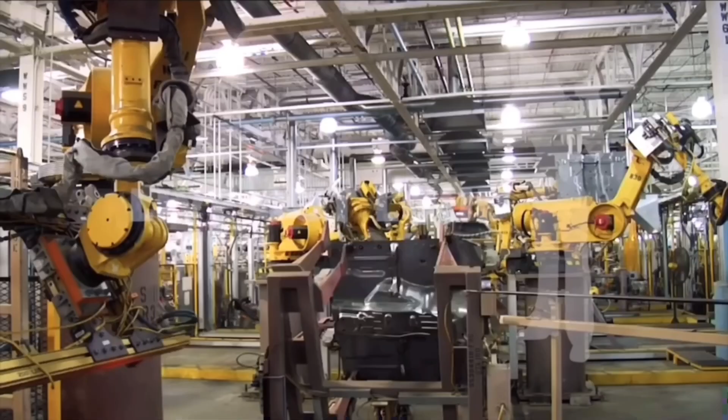Every year, nearly 10 to 30 million commercial flights occur globally, and the chances that you've flown on a plane at least once within your life is very high. You also probably don't realize that flying is one of, if not the safest mode of transportation, and that's thanks to all the engineers, manufacturers, and government-issued safety standards that go into place to make flying safe and at least

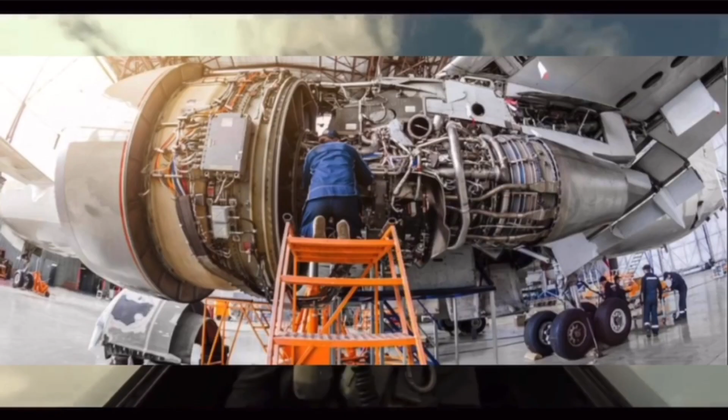somewhat affordable. So obviously, planes are pretty cool, and there are many people who strive to be pilots or just have a general love for aviation and the engineering that goes into it. Unfortunately, I wasn't one of those people, and the only reason I chose aerospace engineering as my major was just because I wanted a stable living. But damn it, if you don't learn to love something by spending 12 to 14 hours a day for 3 years talking about only that, I don't know what will.

Some people just have a natural tendency for it, like this lovely individual here, who watched an old, really horrible quality video about stealth planes I made on this channel. Thank you very much, by the way. And in honor of him, I wanted to make a more high quality, in-depth video, since today's me has a lot more knowledge on it than younger me. So come with me and let's go over some basic topics and fun facts that go into aviation and aircraft.

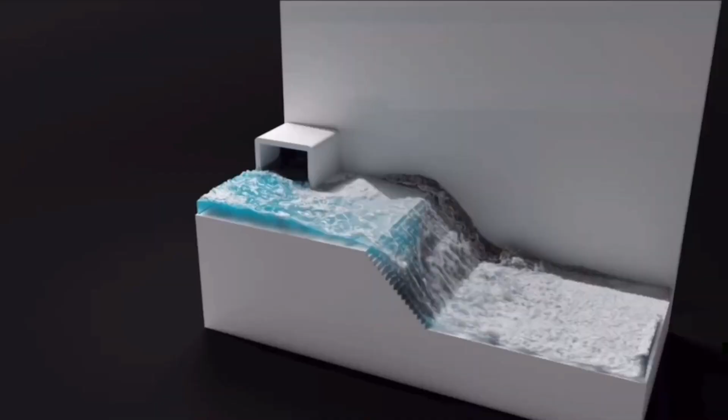There are a lot of fundamental things that are learned before you ever even talk about an airplane, such as statics and dynamics, but the most essential is fluids. A fluid, by definition, is a substance that deforms continuously under shear stress. Liquids and gases fall into the category of fluids, and the property of fluids is actually the driving mechanism for what makes planes fly. We equate the properties of the fluids from one state to another with the Bernoulli equation, at least for very simplistic ideal flows with no extra energy added to the system.

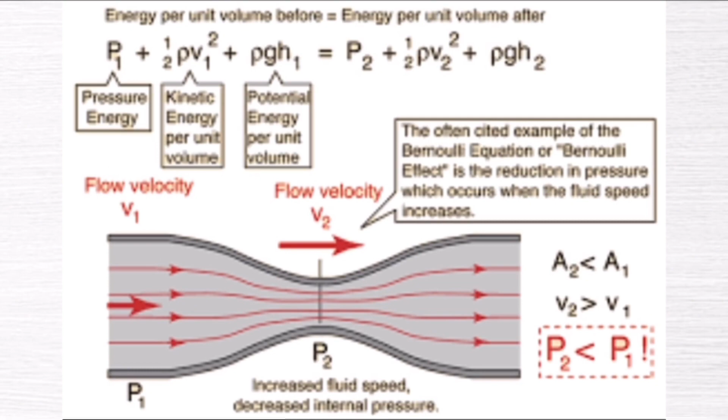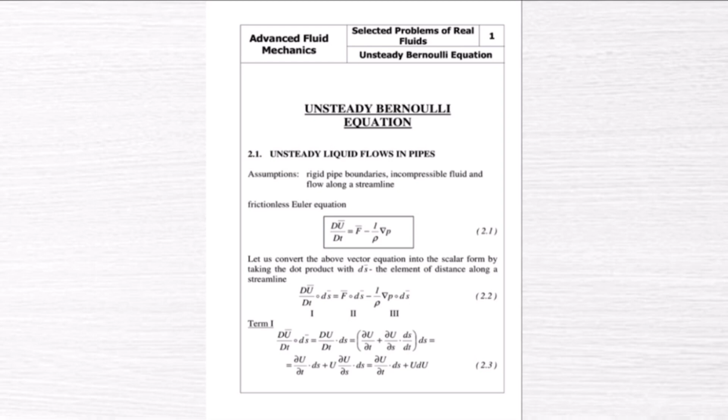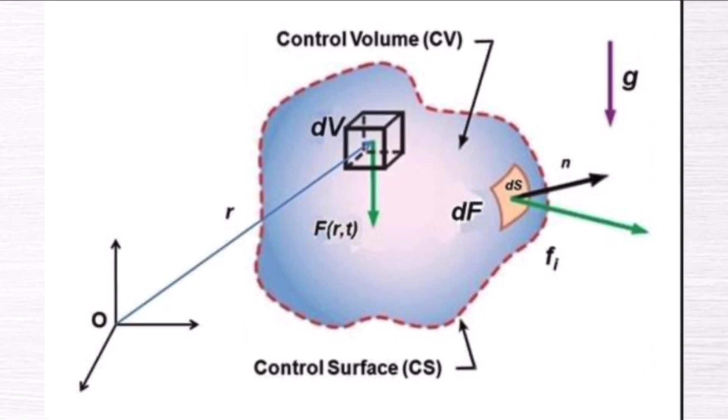This equation itself is actually more complex than it looks, because this is only for incompressible flows, but for compressed airs, the properties of fluids like density can change with location and even time, so a gradient of this formula also exists, and solving it is much more difficult. There are also other ways of calculating different values for fluids, such as how much force it applies when flowing through a system using control volumes and control surfaces, but that's too in-depth and unnecessary for a brief overview.

But looking back at the Bernoulli equation, we see that the two sides must be equal to each other. So if constants on one side remain constant and one value is changed on the other side of the equation, another must be changed on the same side in order to compensate. For example, if we increase the speed on this side, something must decrease on this same side to make it equal, in this case being pressure.

This change in pressure is actually what we want when we want to create lift for an airplane to fly. Controlling the speed of the airflow over and under the wing, we can control the pressure, and if the pressure is greater under the wing than over it, then there's more force pushing it upwards, and this creates lift. This concept applies for both subsonic and supersonic flight, although for supersonic flight, we take into account the change in pressure due to shock waves.

So how do we control the speed of airflow around an object? Well, we do this with airfoils, which are aerodynamic. There are many different shapes of airfoils, but the best shape for easy conceptual learning is an infinitely thin flat plate. Adjusting the angle of attack for a flat plate, we see that the airflow must go around and over the flat plate in order to reach the back tip. We call this the Kutta condition.

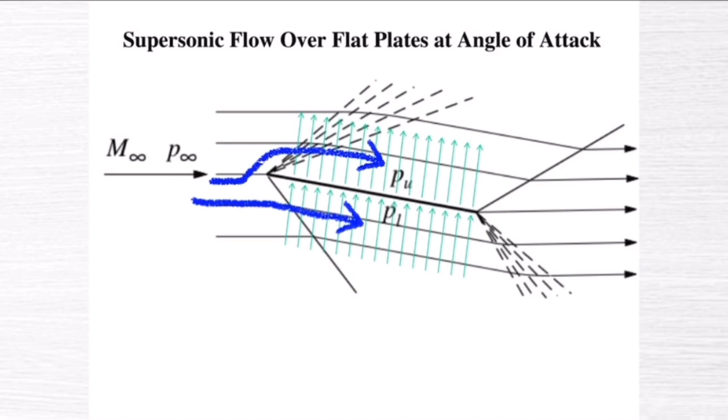Since the top flow needs to travel a further distance in the same amount of time to both leave from the trailing edge, it makes sense that the top flow must be faster and therefore have a decrease in pressure compared to the bottom flow, allowing for that desired pressure difference. Now, very rarely do we deal with the actual values of pressure, lift, and whatnot in aerospace engineering, but more so we deal with the coefficients, which are non-dimensionalized, so that we can relate how a prototype will work to how the real thing would work.

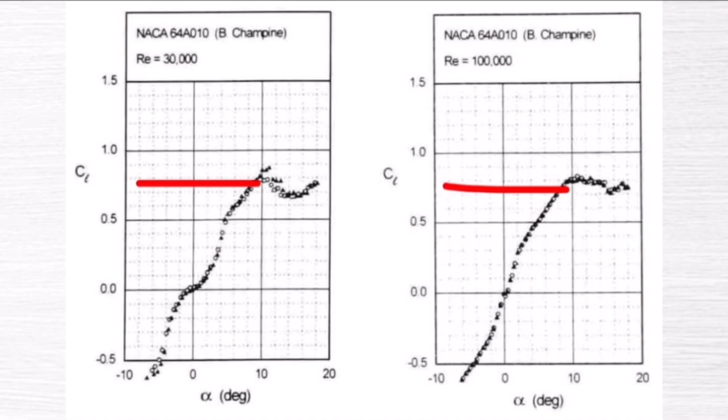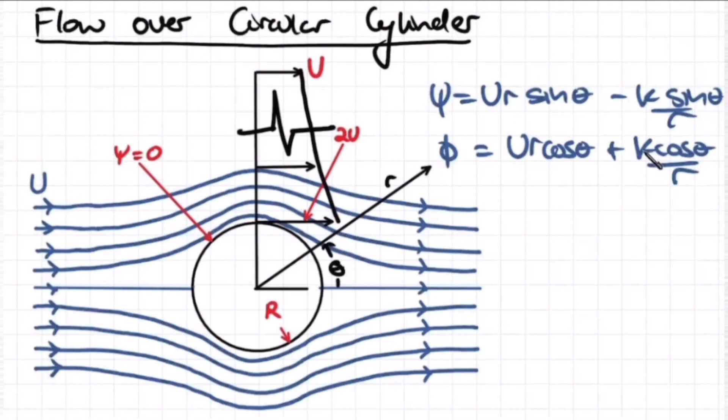We can look at many different lift curve slopes for different NACA airfoils, and we see that each airfoil type has their own different slopes, max lift coefficient, different angles of attack for stall, and whatnot. We can also see their drag coefficients, but we won't talk too much about drag because drag has a lot to do with form drag, which is the shape of the object, and friction drag, which has to do with viscosity and the Navier-Stokes equation, and it just sucks.

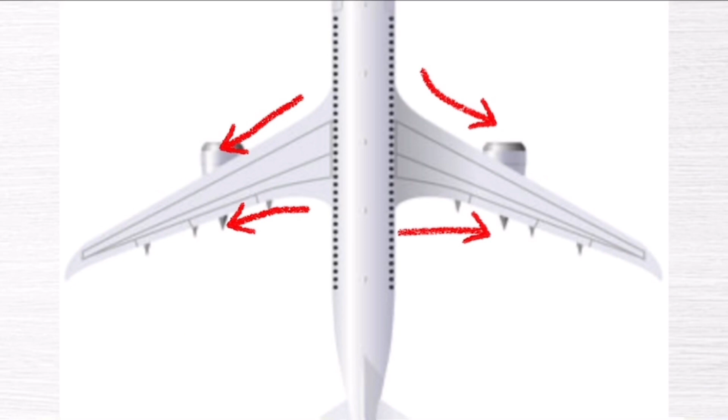So just leave it alone for now. But keep in mind that an airfoil is not a wing. An airfoil is two-dimensional and just the cross-sectional shape of the wing at any point. And since wings usually change their shape from the root, then the airfoil changes along the wing as well. So when we do look at the wings, we already know it is the accumulation of all the airfoils one after the other composing the entire wing.

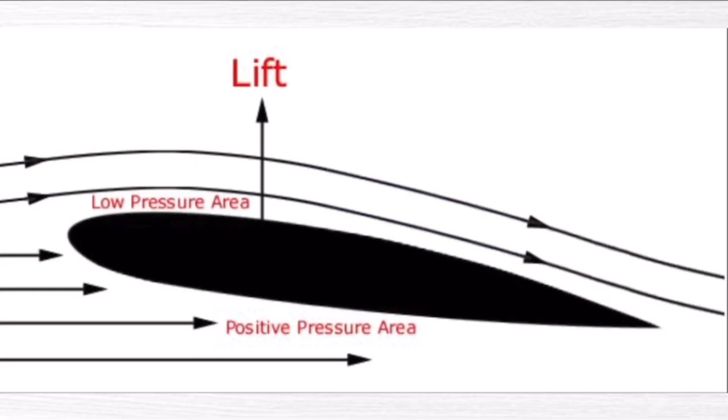So to find the properties of the wing, such as lift or drag of the entire wing, what we have to do is integrate the properties of the airfoils along the wing to find the values for the wing itself. So there are simplistic formulas to calculate the lift and drag of an airplane at different speeds, altitudes, or whatever, but what we need are these lift and drag coefficients.

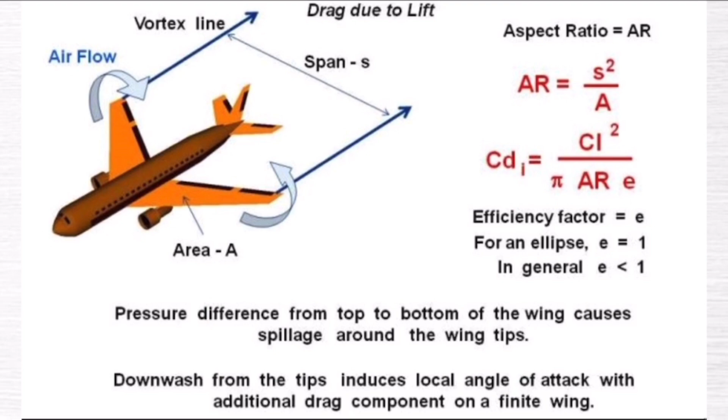These coefficients are solved either experimentally through prototypes, which is an expensive endeavor, or through computation since the mathematics cannot be done by hand. There are other ways to solve a simple wing design by hand, but there are a lot of assumptions needed to be made, such as having an elliptical planform shape, which obviously isn't true of all wings. Most of the computational methods for solving for these wing coefficients that include not only the wings but the effects of the horizontal and vertical stabilizers are paid for by companies who have already made them.

But the most simplistic computational methods I learned in college for incompressible flows are the lifting line method and the vortex lattice method, which have their own strengths and weaknesses, especially when compared to professional softwares that are obviously super powerful and give high accuracies for real-world expectations.

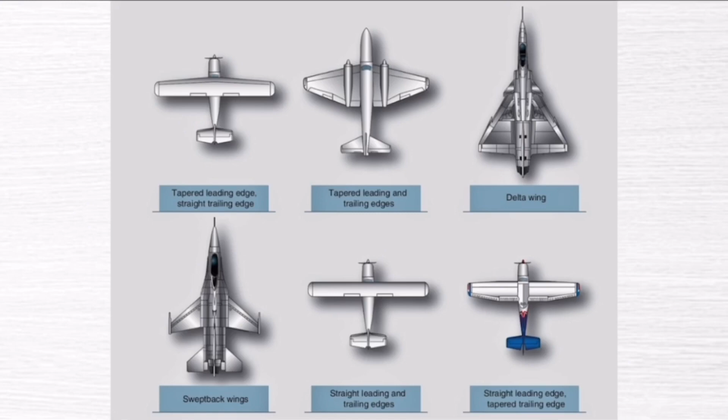Now, as we see, not all airplanes are built the same, and we see the biggest differences between commercial planes and military planes. Commercial planes are bigger, longer, and have more thickness than that of the military planes, which have shorter, swept, and perhaps even delta wings, which are very thin. The differences for these structure types is due to functionality and what the jobs for these airplanes are.

The wings for commercial planes are built for functionality and high efficiency, kind of like a car that is built to get more miles per gallon. They aren't meant to fly super fast, they are meant to get from location to location, usually from large distances, with a lot of weight of passengers and luggage with the least amount of fuel possible.

Fighter and stealth planes, however, have a totally different goal. They are built for speed, maneuverability, and stealth. Due to the designs of these planes, they are obviously more difficult to fly, and they also eat through fuel very quickly, but they aren't meant to fly for long periods of time. They are meant to take off and land in a short period of time and not really go far distances like commercial planes.

The reason for the thin wings and the thin fuselage is due to their requirements for stealth and avoiding radar. How radar works is that it shoots a wave in all directions, and when it collides with an object, those waves bounce off the object and return. When they return, the incoming waves are read, which indicates it bounced off an object, therefore something is there, and now you're on the radar.

So if a big ass commercial airplane were to fly into monitored airspace, that round fuselage would bounce back so many of those waves, they'd be seen instantly on the radar. However, a stealth plane with very thin and angled wings and fuselage obviously has a smaller area which can bounce back the waves. But also that angle deflects a lot of those waves rather than having it bounce back.

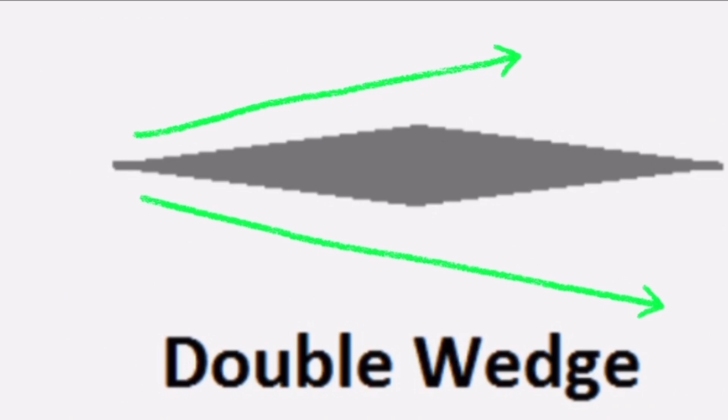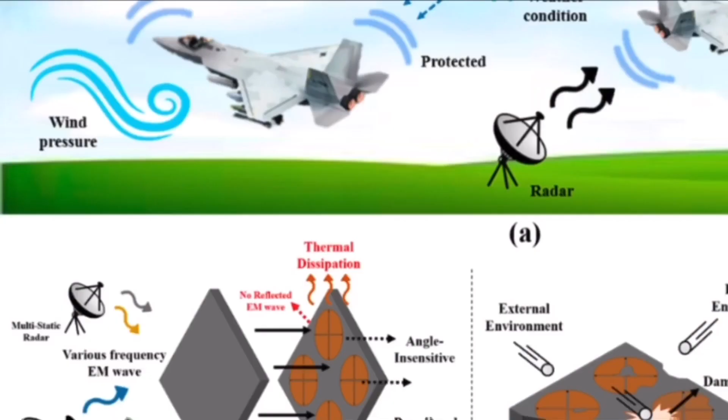We discussed the infinitely thin flat plate airfoils earlier, but obviously that's not possible in the real world because if it was infinitely thin, it would have no structural integrity, but engineers aim to make them as thin as they possibly can. Also, the material that makes the outer coating of these stealth planes also has the property of absorbing these waves, reducing the chances of waves bouncing back.

That's really all I have for you today with what I have learned so far. This is the bare bones basics of things I've learned during my time in college. Of course, I've avoided heavy mathematics and other very intricate details, but there's just no way to explain all this stuff in like 10 minutes.